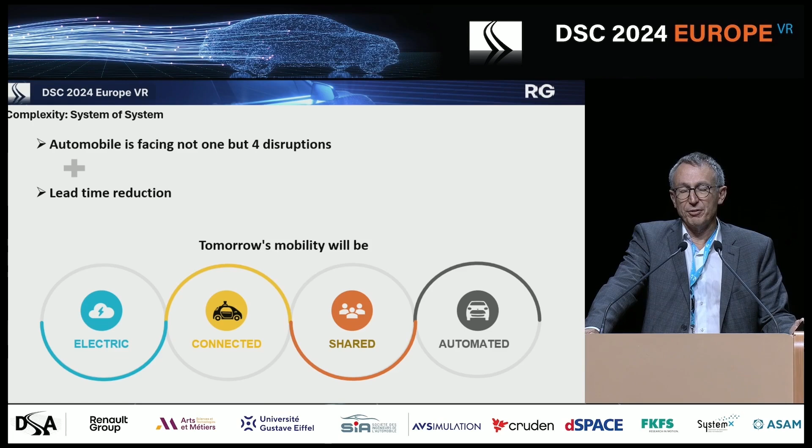And in terms of mobility, what is important is we spoke of ADAS, but the business is not only ADAS. Tomorrow's mobility will be based on electricity, electric cars, connected cars, shared cars, and automated cars. So you see that with all these domains, you have to face what we call system of systems, and validations will be more and more difficult.

Just to illustrate what complexity means, I take the example of what we call software-defined vehicle. So you have to face very important difficulties. The first one is the business model is changing, so you have more and more new applications that you have to integrate.

You have also difficulties in terms of electronics, design, or architecture, because more and more you are switching from ordinary normal design to IT design - you are integrating car OS, for example Android, you are integrating Ethernet in the car, you are integrating new components, so the hardware becomes very, very complex.

You also have to face new business because you have service-oriented architecture, so after the start of production of the car, you have to be able to integrate new applications, and you have also to integrate validations. Yesterday we spoke of AI, and you have to face that when you change the data, you will have to redo the entire validation cycle, and of course homologations.

You have to integrate safety and security, and in particular validate that your car is compliant with cybersecurity, and you have many activities to validate that.

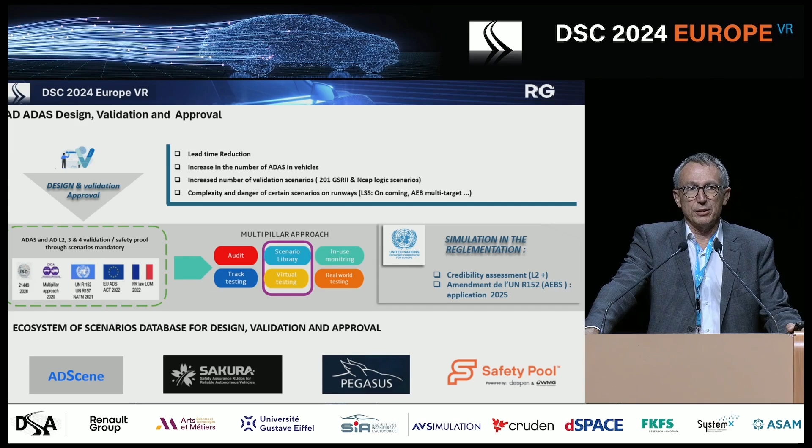And the way is ongoing now, because credibility assessment has been agreed, and you now have an amendment, for example for AEBS, to be able to do validation for homologation using simulations. So you see that regarding homologation, complexity and demand for simulation is increasing.

For the second topic: what? So we have explained the context. Now we will explain what we want to do.

What is important is that when you have to validate, validation using simulations can start before reaching the bottom of the V-cycle. You have to put your simulations throughout all the design, and high-level test plans can be arranged at any step.

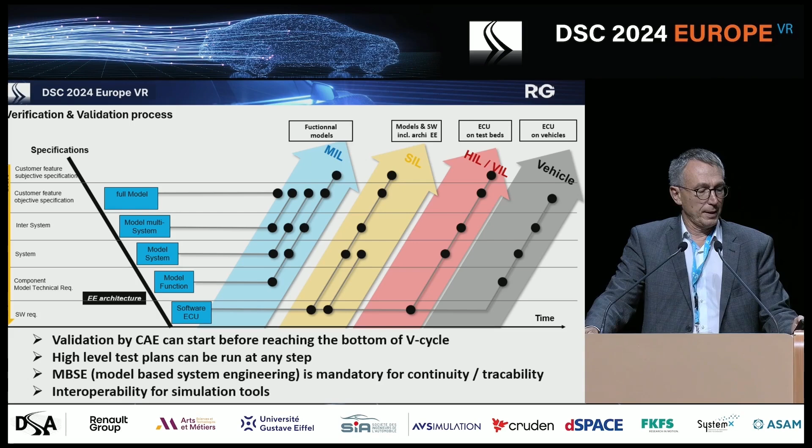Just to have an overview of the activities we have to do: we have to create a baseline, and baseline means creating models. To create models, as you make synthesis simulations, you need to use standards. We use FMU standards, because they help you make simulations using physical modelizations but also software modelizations. You also have to create scenarios - there are big initiatives regarding scenarios - and you have to create terrain.

Based on that, you have to create your simulations platform, and your simulations platform is based on 3 topics. The first one is to create the digital vehicle, create driver models, and integrate the environments.

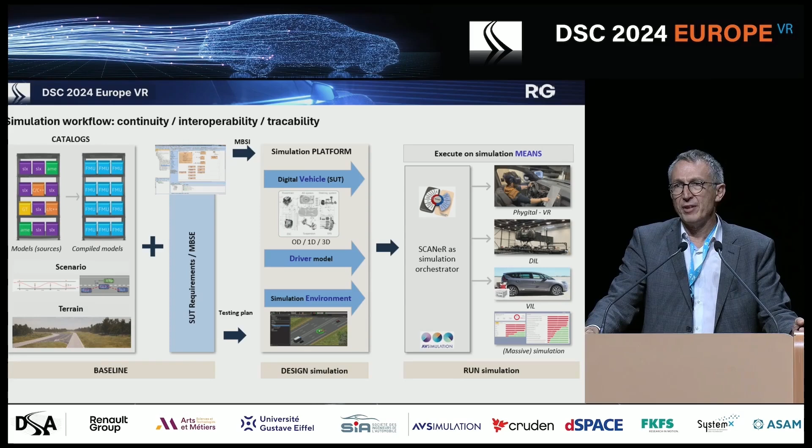As soon as you have integrated everything together, you need to be able to play these environments on different assets for simulations, and these simulation assets need to be continuously linked. When you have a validation plan, you have to define what you want to validate, and depending on what you want to validate, you can address different systems for simulations.

For that, we use a virtual reality platform, a driver in the loop platform, an integrated electronic platform, or a cloud computing platform. All of that, again, needs to be managed by PLM, meaning you need to be traceable and manage configuration.

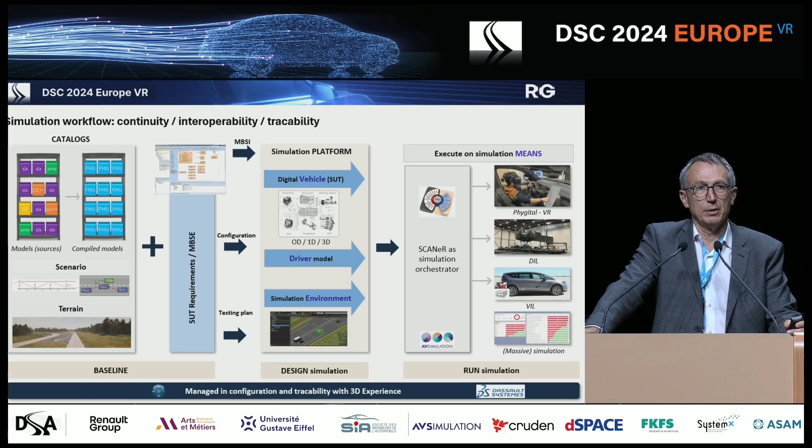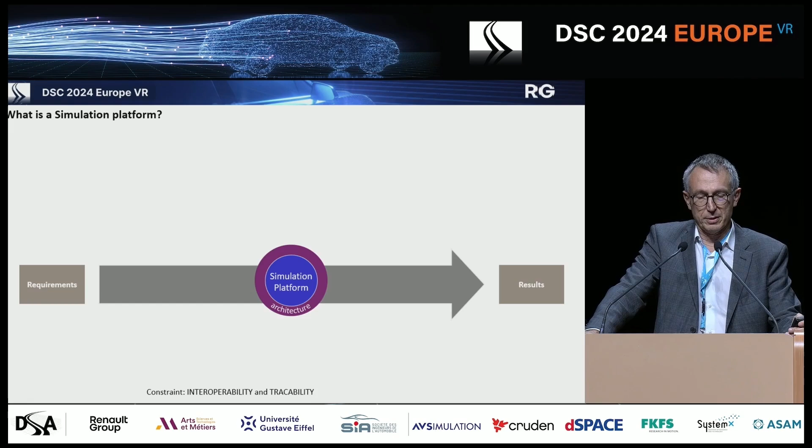How do we do that? We have to create the simulation platform. A simulations platform starts from what you want to do, so the requirements, and what you want to test, the results. The simulations platform is built on 3 pillars.

The first pillar is to create the digital vehicle, as I explained. This digital vehicle is based on compiling different FMUs according to a definition or configuration that you have in the PLM.

The second topic we have to do is to simulate the driver. So you have 2 types: either the driver is a real driver in immersive simulations - that's nice - or the driver is simulated.

If you want to go to cloud computing simulations, then you have a model-based driver. You need to adapt the driver, to modelize the driver, and of course the driver is related to the scenario and the dynamics of the car he is driving.

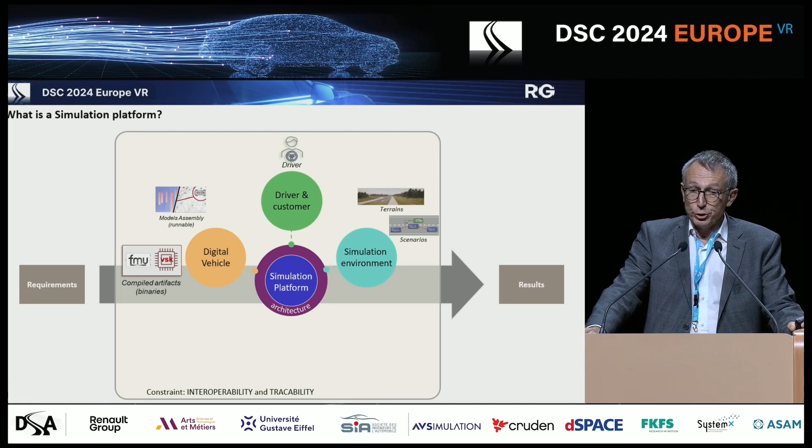The third topic is environment simulations. You have to create terrain, you have to create scenarios. Again, as I explained yesterday, some scenario databases could be shared, and so it's something that could be managed and shared with all the stakeholders.

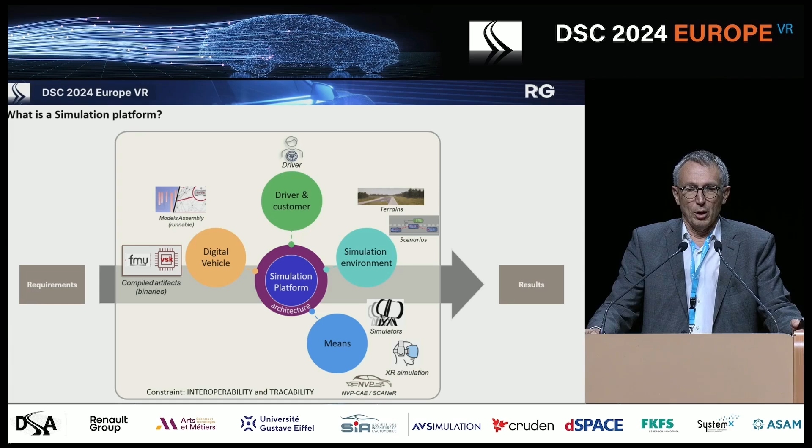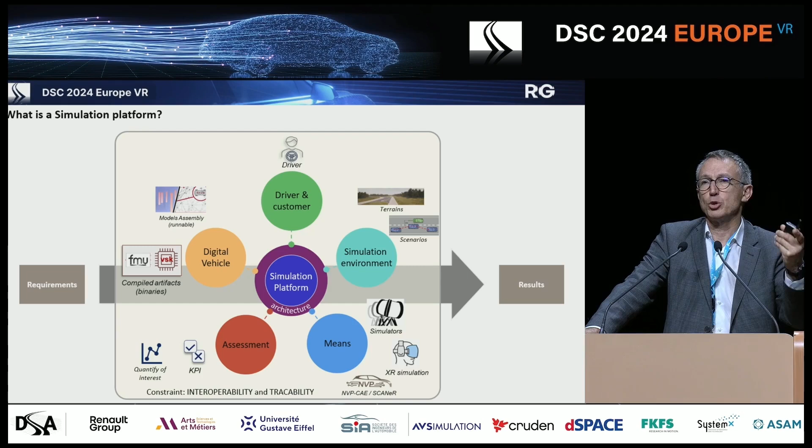As soon as you have created this simulations platform, you have to run it, and this simulations platform can be run using driver in the loop, XR simulations, or cloud computing. All that needs to be linked to requirements because the requirements have an effect on the simulations platform - depending on the requirements, you define which simulations platform you want to use.

Just to explain how we manage continuity: as Thomas explained, SCANeR is important for us as an orchestrator, but SCANeR doesn't do everything. It's linked to different environments, and we use SCANeR to drive massive simulations, meaning we launch millions of kilometers, millions of use cases on cloud computing.

So now we are switching little by little to Google Cloud. We can also, in some cases, use driving simulators, so we can extract some scenarios from the massive simulations and replay them using a driver in the loop simulator. We can use the same environments with hardware in the loop, of course.

In that case, we disconnect the model of the ECU and replace it with real ECUs, but it's the same simulation environment. So what's important is this interoperability and continuity.

We can use it in vehicle in the loop, putting the driver in the loop but with a real car. And finally, we can use it in a virtual reality environment, because it's very important to address acceptability and things like that around HMI, for example.

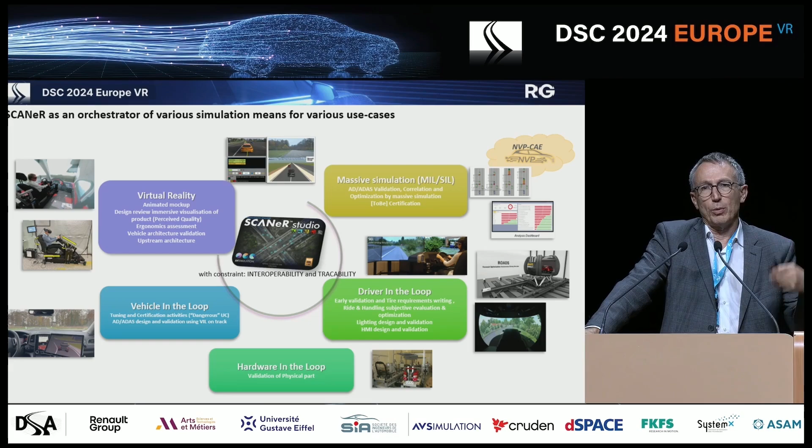Just to illustrate what we do in immersive simulation: 3 topics. The first one is to use our ROAD driving simulator - Renault Operational Advanced Driving simulator - which is linked to the scenario, to drive a digital vehicle, and we put the driver in the scene. So can you launch the video, please?

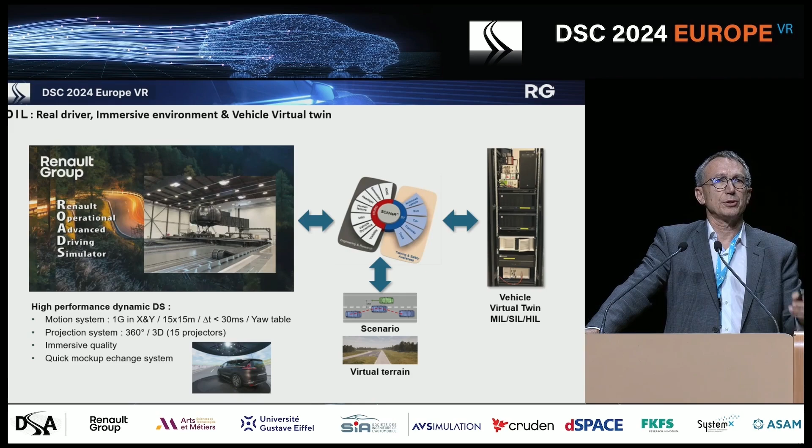Okay, just to illustrate what we are doing. So ROADS is our dynamic simulator in Paris. So you see on the screen, it's what our test drivers use. It's a test track that they are used to. And what they are doing now, for example, in ROADS, they are testing new tires, new chassis, and new design of the chassis. So it's very useful in very early stages in the development phase.

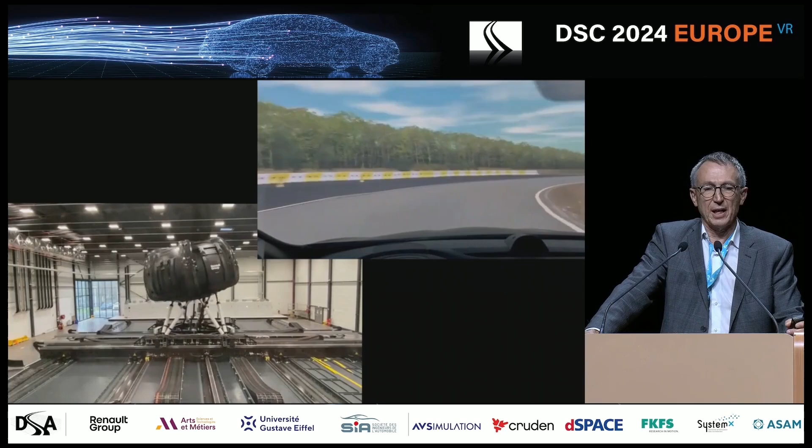And we are able to reach 1G acceleration, and the latency is 30 milliseconds. So they can drift, they can check what is the behavior. So you see. So the difficulty for this type of simulator is motion control, of course, because it's of order 1 to create immersivity.

The second type of immersive simulation that we use is what we call vehicle in the loop. So vehicle in the loop is, I should say, augmented reality for a driving simulator. It means that you have in the back of the car the same scenario that you use for massive simulations or for the driving simulator. And this scenario is connected to a real car.

So we inject information into the electronic architecture, but the car is a real car with a real driver. So the real driver has the feeling that he is in a car, on a track, but there is no car. So you see on the right side, you have, for LSS, oncoming traffic. So it's quite dangerous to do it in real life, even if it's a mock-up. But you drive very close to the mock-up, about 30 centimeters.

And on the screen just above, you have the same situation, but the driver drives it on an open road with no cars. The car is only a simulated car. Of course, the driver has the feedback of the scenario on the screen. So that's another topic, and it's very useful for people in charge of fine-tuning of, let's say, ADAS systems.

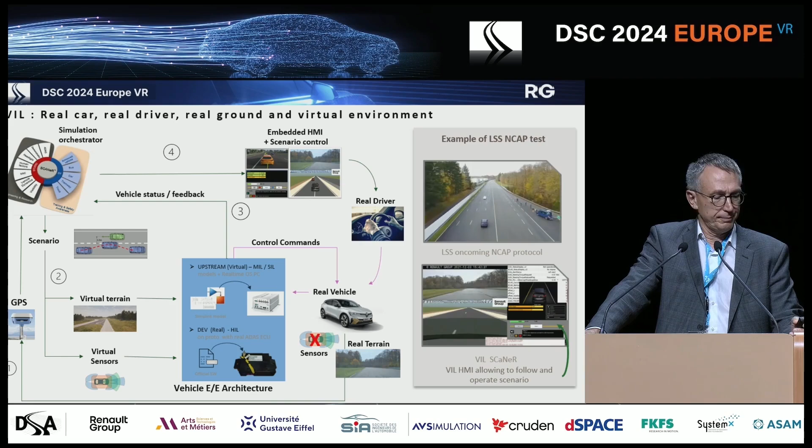And the last topic is what we call the immersive virtual twin. So when you use virtual reality, you have a paradigm. You are in a virtual world, but you want physics. You want to touch something to create immersion. So what we are doing now is we integrate 3D modeling. So we use the digital mock-up and we animate the digital mock-up. So for example, we use Unreal to do it.

We use physical parts to create reality, because you need to touch something, you need to have borders if you want to enter the vehicle. So it's not a prototype, it's just parts of wood, very simple. But we also add functional models, because sometimes you want to test HMI, you want to test new assets, so you have the functional model. So if you look at that, you have the reconciliation of two worlds, the 0D world plus the 3D world.

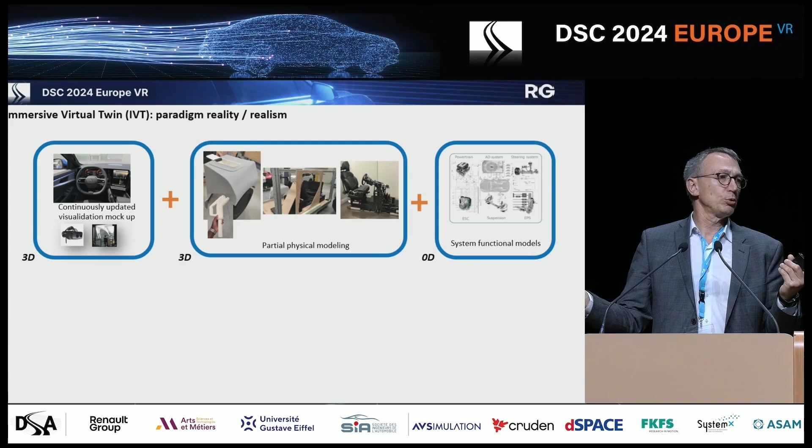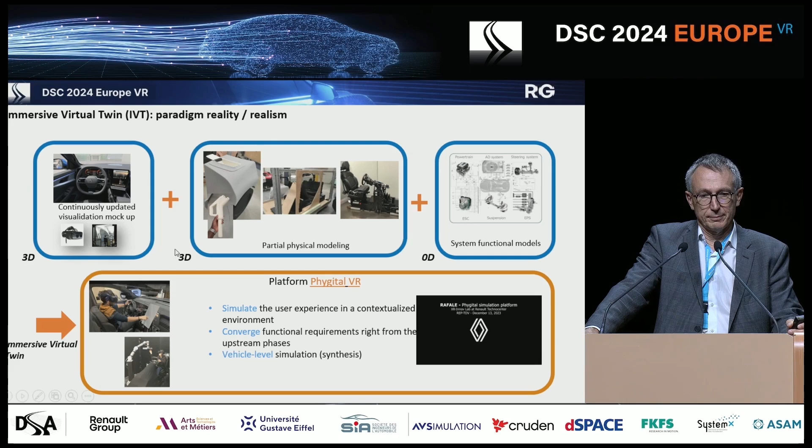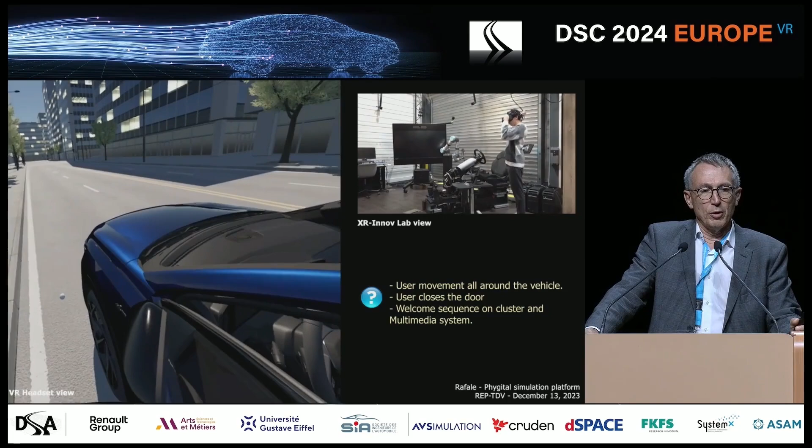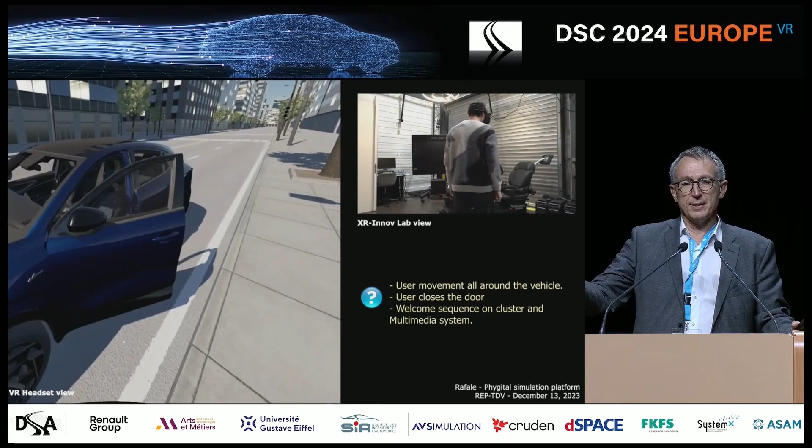And with this phygital platform, we simulate user experience, converge functional requirements, and make the synthesis for the project. Can you launch the video, please? So you will see an example of what we did on the Rafale. So you have on the right a seat. You have a user with a headset, and the user is entering the car. So you see on the left side what he is doing.

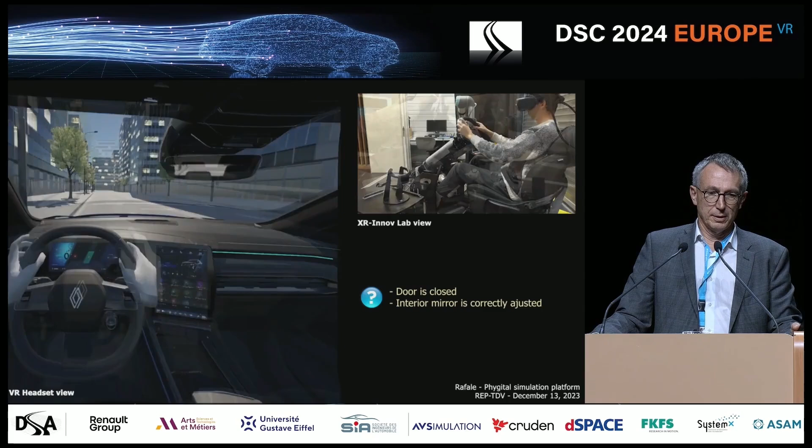So you animate 3D parts. We are able to touch the screen. So when he touches the screen, the 0D model of the HMI is acting.

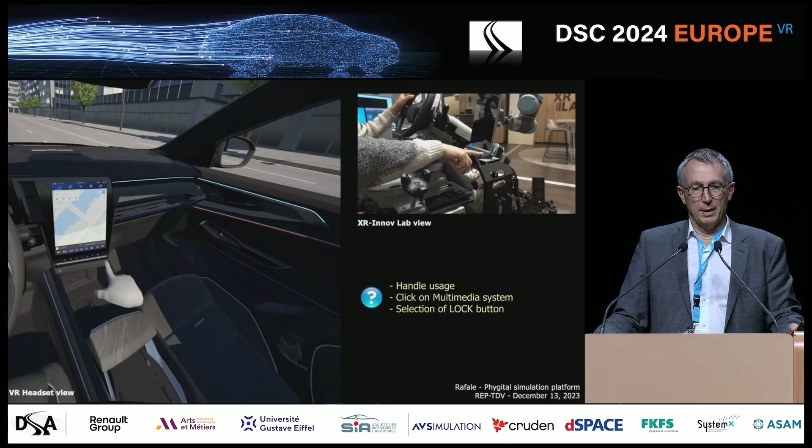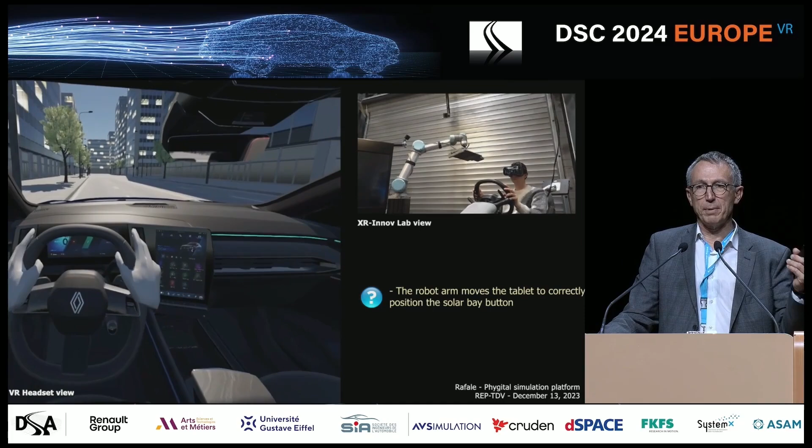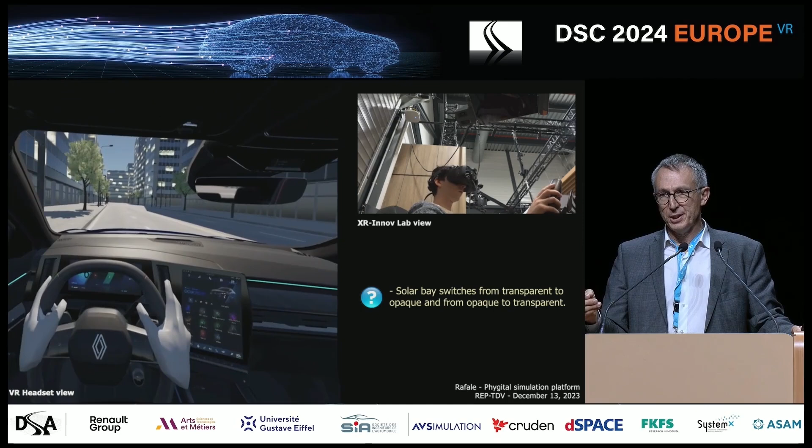And at the end, if you want to touch another button, a virtual button, we have a robot putting this virtual button at the right place according to the architecture of the vehicle. And he can press this button, and on the Rafale, it was for the solar bay, and we can animate it. So just an example of what we are doing, combining 0D, 3D, and physical parts.

Just to finish, some ongoing challenges, because all that is only possible with some enablers. The first one is to manage configuration. I explained that model-based system engineering is mandatory if you want to have traceability and continuity. You have to manage interoperability and continuity of the tools, because you have to switch from one means to another, and it has to be continuous.

Third thing is to manage simulation models, and for that you have to use standards, OpenDRIVE, OpenSCENARIO, FMU, and so on. And the last one is important also for homologation. You have to manage correlation. Correlation is very important because homologation needs to be correlated. Assessment tools need to be correlated.

So at a certain point you have to switch from digital vehicle to virtual twin, because this virtual twin, as I explained, is a new business, and will have to continue to work and to be used after start of production, because when we change software applications, you will have to redo the whole validation process.